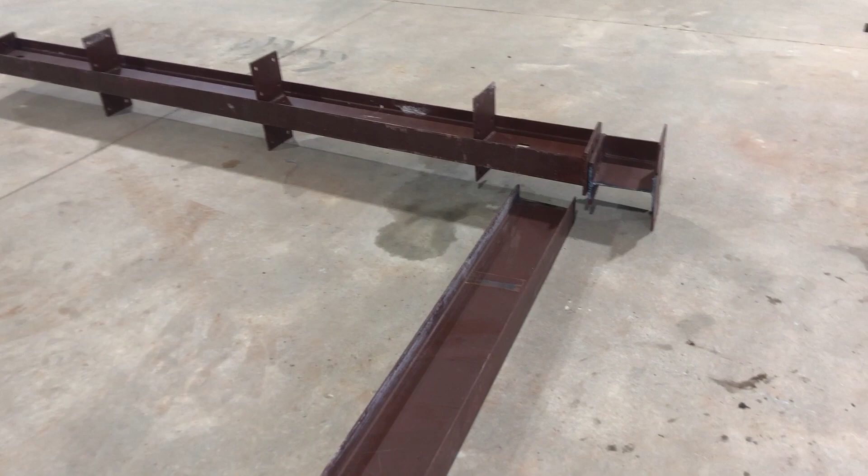So I'm going to explain to you guys why I'm out here cutting all the top of these columns off. Take you over here to the plans. This is a 40 by 80 building, and I have a 10-foot porch that comes off around half of it.

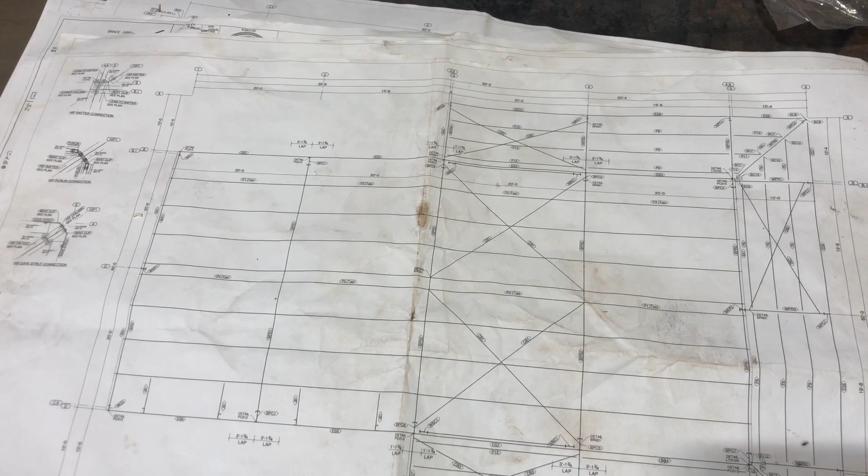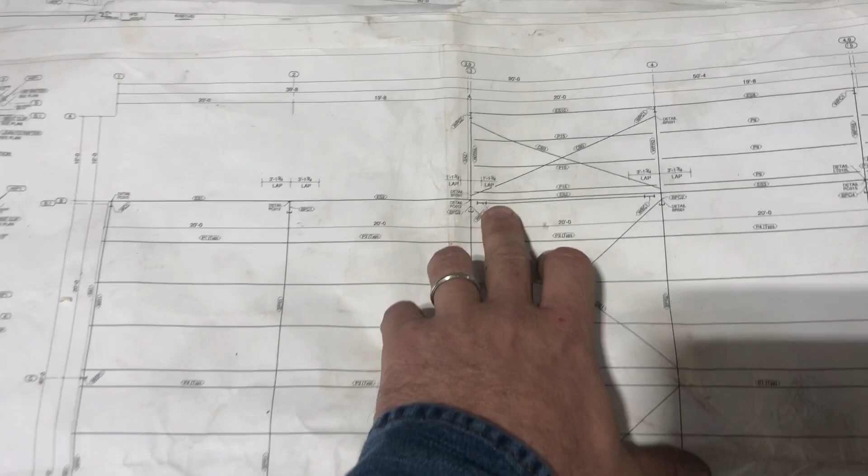What I did is when I poured this porch here, because this is already poured, when I ordered the building, we said we wanted a 10-foot porch. Like I said, this is already poured. I made it 10 foot from the edge of the keyway here to the outside edge.

Okay. Some metal building companies do things different. Well, they all do something different. Even the same companies do stuff different. And you really got to pay attention to what they're doing. I screwed up. I missed it. It's all on me. I don't really have a good excuse for it.

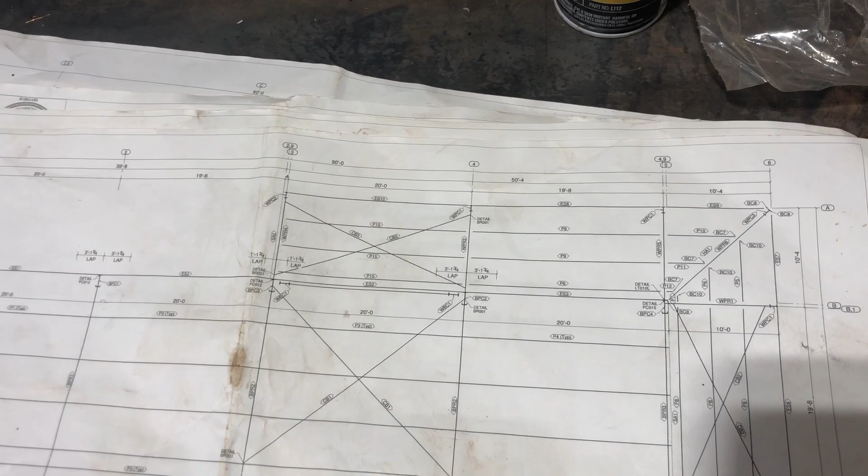But so I have 10 foot from this edge to the edge of the porch. And that's exactly what this is going to be. This is my rafter coming off my building to the edge. So my column, if it was out here connected still or not cut, the edge of that would be exactly 10 foot.

And the customer told me, when we're planning this, that he wanted the columns out on the porch rocked probably about 3 foot up. Well, if you try to rock 3 foot up, the outside edge of that rock is going to be hanging off the porch. So I had to fix it. So that's the best idea I could come up with.

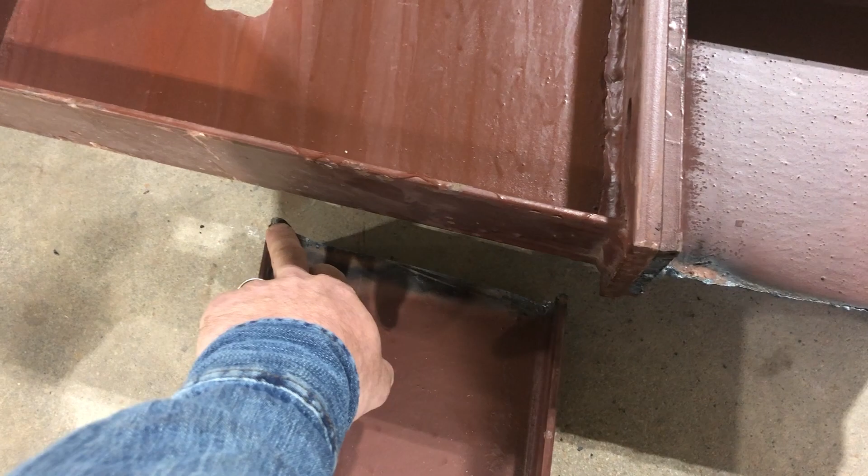I really think this will be stronger anyway, because otherwise everything would be held up by these. There's 2 bolts on each side. There'd be 4 bolts, which I'm sure would work. It's not a real big porch or anything, but what I've done is just cut that off, and I have some 3/8 plate that I'm going to weld on top of this. Then when I set the columns, I'll set the rafters on top of the columns and just weld it to it.

And another deal is this one's not my fault, but the elevation change on this building, not the building itself, but the porches are screwed up. My keyway is 1.5 inches drop. Then I always slope my porches like everybody should do. I slope 1.5 inches or 1 inch in 10 foot just to keep rainwater from coming up to your house.

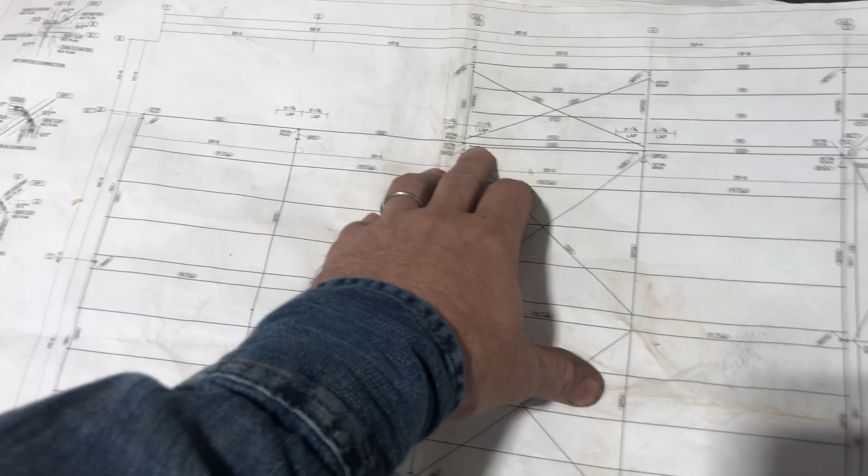But what they did is they only figured a 1.5 inch drop total on this porch. So I have to figure out how to elevate these another 1.5 inches out here to make up for the slope. And to do that, I'm just going to put some anchors down, then put some adjusting nuts on bottom of the anchor bolts and adjust it up. So that's not that big of a deal.

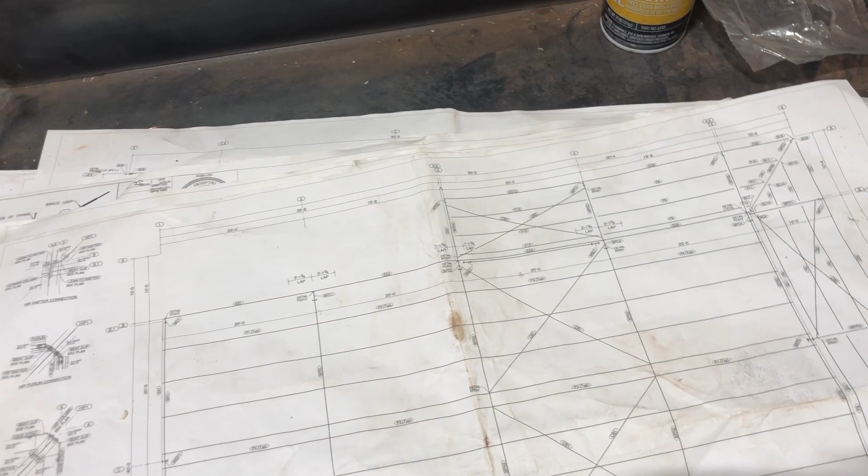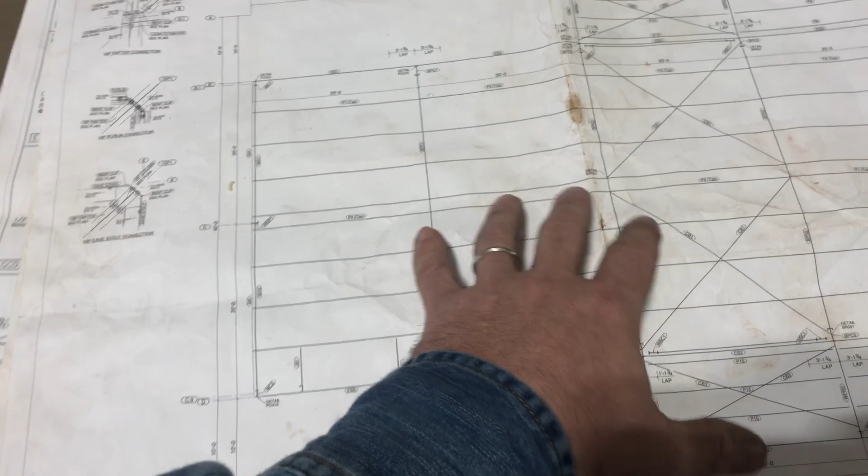It is irritating because I caught that in the approval plans, and they didn't fix it. Since this is a shop part of the house, I also caught this too. I tried to drop the floor down in the shop 1.5 inches because he's gonna have his hot water tank and some stuff out here, so if the hot water tank ever blew out, you wouldn't have to ever worry about water getting in your house. But they didn't do that either.

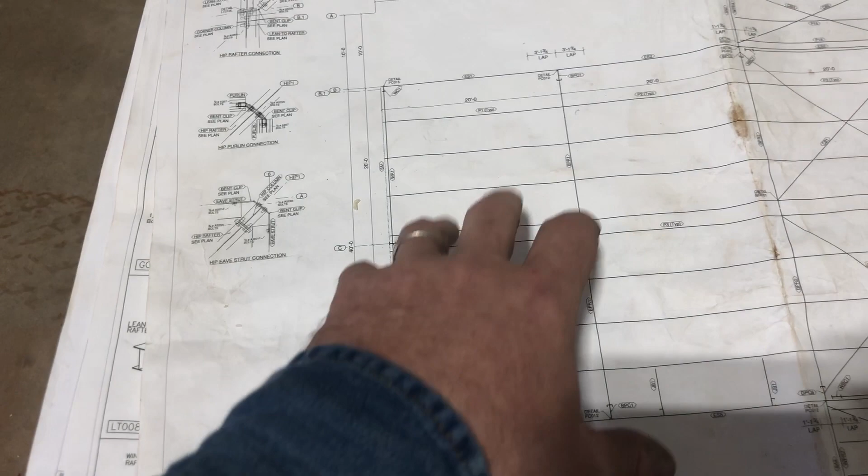So here's your doors. So I sloped everything in this floor out towards the doors. I could have done the same thing if I really wanted to, but it was just easier for me to slope everything out towards the doors. But anyway, that's why we're out here cutting all these up, and I got 5 of them done so far.

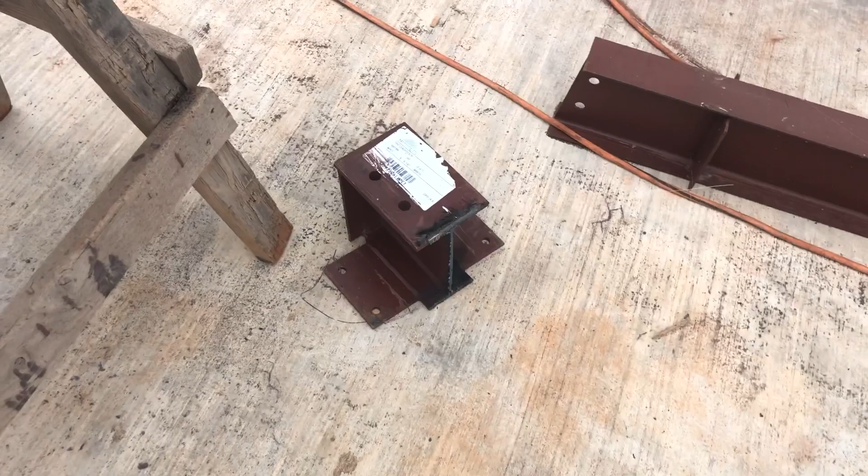They sent me some primer. I'll grind these down, touch them up with a little primer, make them look better, but it's just one of those deals where you gotta stay on your toes and really look over your approval plans before you sign off on them.

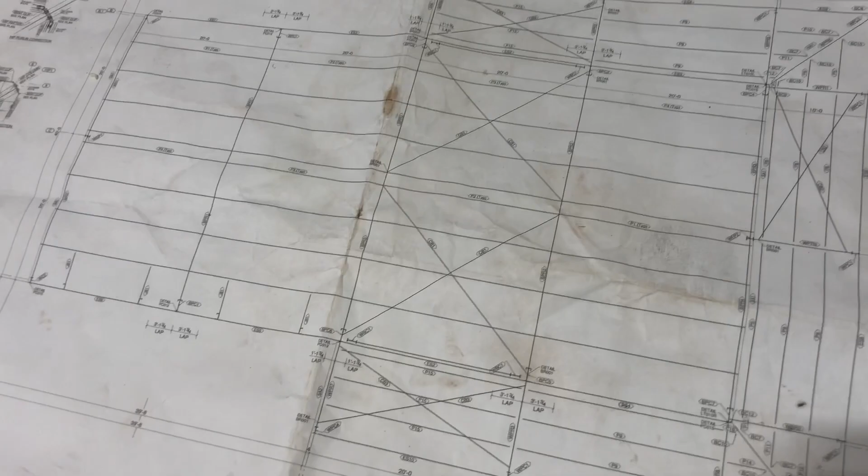But the metal building company did admit fault at some of this stuff, so I'll charge back a little bit for that, but it's not the end of the world. So anyway, that's a little better explanation of why I'm cutting these up.